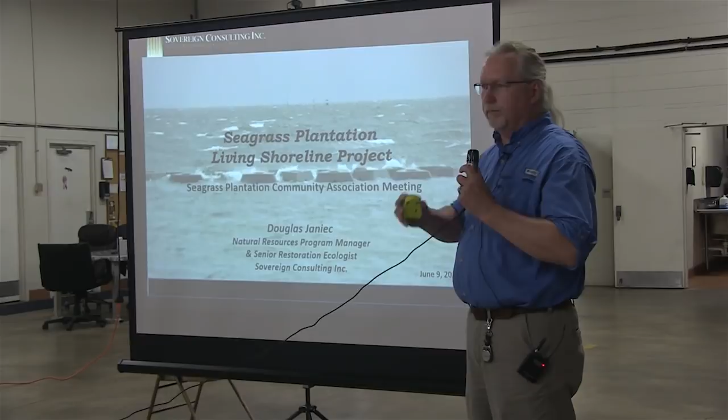Thanks, great. Well, thank you for having me here. If anybody has any trouble hearing me, raise your hand, and I'll make sure I get the microphone close. A little louder, how's this?

All right, okay, what I'm going to do here, this is going to be about a 20 to 30 minute talk, and instead of just saying what we're planning on doing, I want to explain to you why we're doing it and give some background. We're going to go back to 1963, what this place looked like then, and go through real quick on what's been happening, so you understand why this is happening. It makes more sense of what we're trying to do.

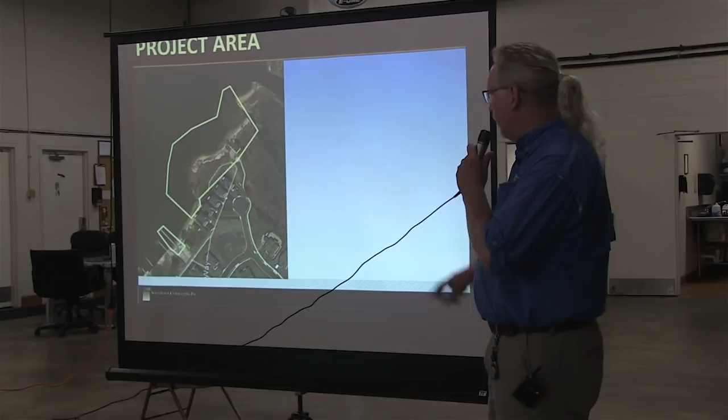Just back in here, get going. Okay, this is the Seagrass Plantation shoreline. This is essentially the project area. When we first started, this is also the study area where we did our site assessments. Another way of looking at it, this is the coastline we're interested in for the project. This is what's under the ownership and control of the association.

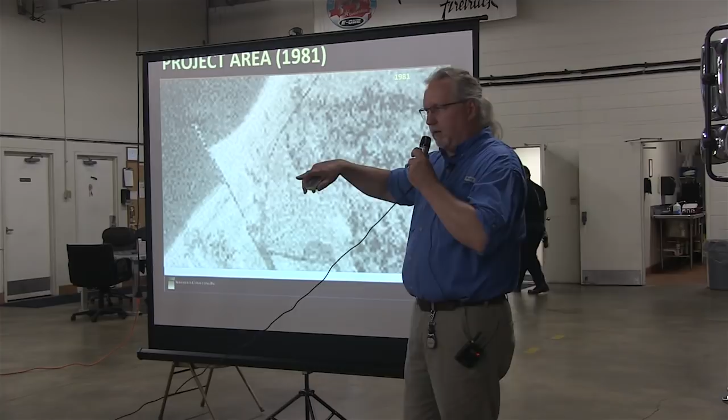This kept clogging, and eventually it was extended out. Here's what that looked like. They had to extend the sluice into the water a fairly good distance so that lateral drift wouldn't keep clogging it—going beyond the sediment drift, extending up.

As soon as they did that, it affected the shoreline. Here's the original shoreline edge approximately. You notice to the northeast you get more shoreline, and to the southwest you have less. That's typical groin jetty phenomena, based on the way the flows are. But that's where it all started, right there.

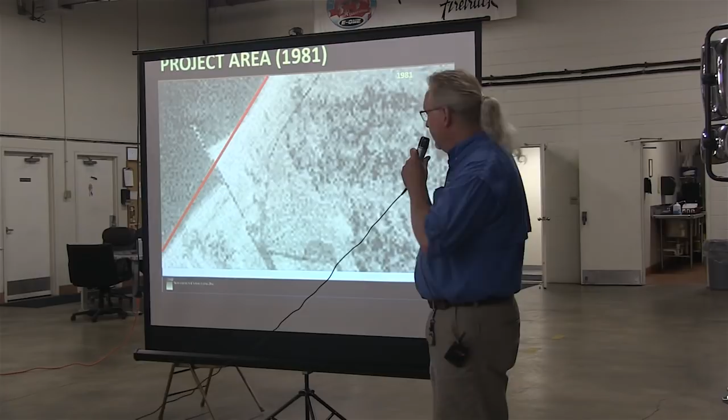So you had a real nice beach here for a long time. Along the shoreline you had a constant feed of sedimentation and not a lot of energy to pull it out, so when it got there it kind of stayed, unless you had a big storm or acute storm event.

This is an important little line here—we'll come back to it later. You can see where that line goes, just in front of the sluice and down to roughly a little bit west of where your boardwalk is right now, going out to the beach.

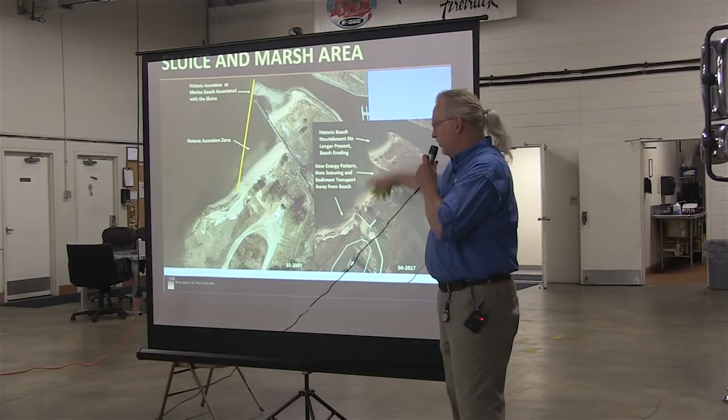Then 10 years later, in 2017, we have a failure in the sluice. This supply is no longer there. We have erosion of the beach up here, and this beach is now eroding out as well, even further.

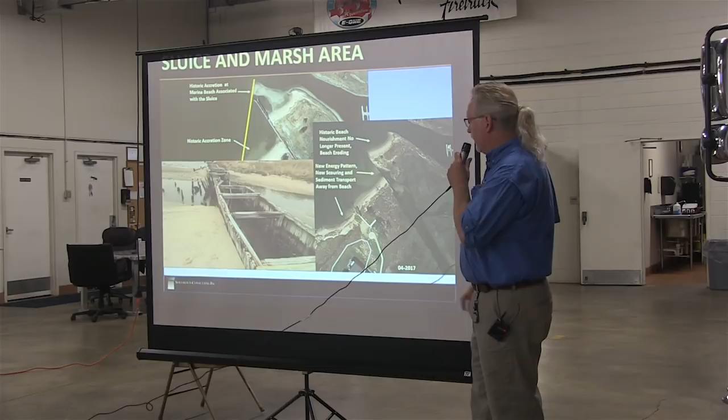That's the failed sluice—I'm sure you've all seen it at one time or another. What's happening is, since the sluice is clogged and not letting water go through, the main flow of this marsh goes through the breach, parallel to the shoreline, until it hits some structure—some remnant, either a dock or an old ramp. It bumps out a little before going out, and that's scouring your beach. Right now, the main problem here is the breach.

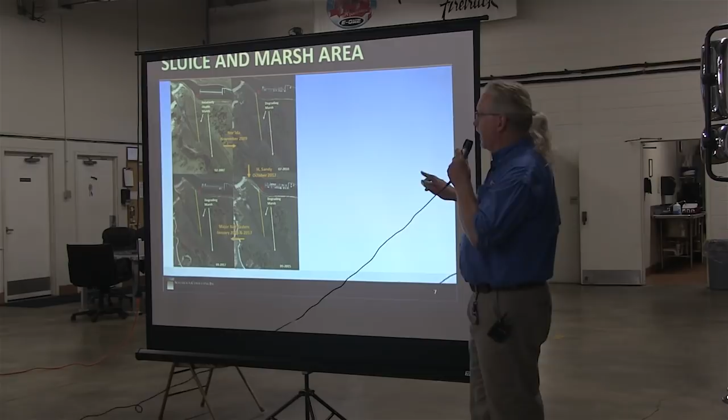So how did this happen, what caused this? If you look back at this series of aerial photography going clockwise, in a nutshell, when you have a big storm the marsh goes underwater by a couple feet—like a hurricane, a nor'easter, or a big blowing tide storm you'd get in the wintertime or fall. What happens is you have a low spot up the marina.

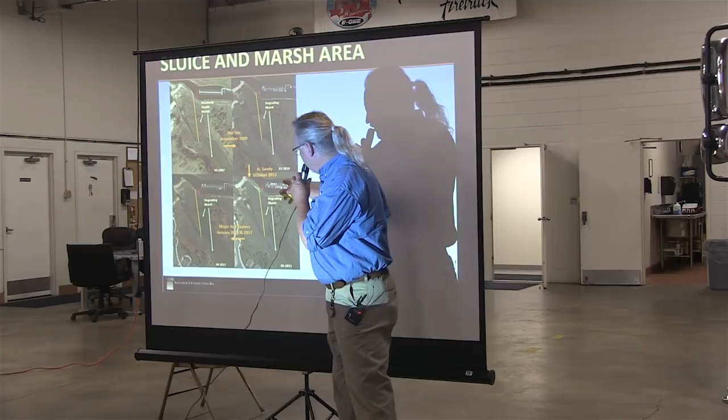That's probably where most of the water comes into that marsh, through that low spot when you have high water. It fills up, but when it recedes it can't get out the same way—it's trapped. Usually the sluice lets that out slowly over time, but the sluice is all clogged up, so the water finds its weakest point, which is where the breach occurred. Over time, all this energy coming from inside out hits your breach, and we're going to show a blow-up of this here.

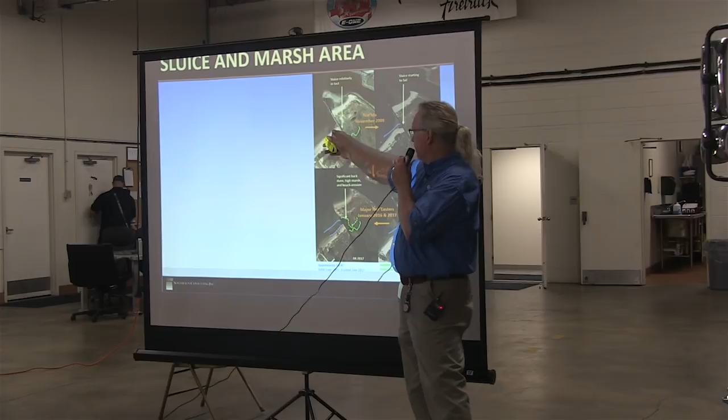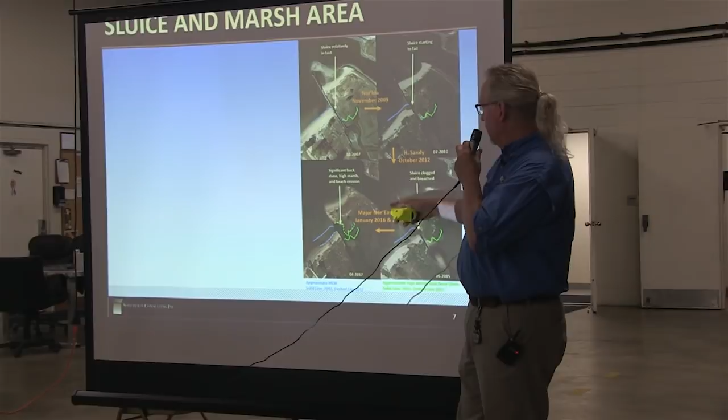I put a couple lines in this. This blue line is where your low tide line was 10 years ago, and this is where the back of the dune and the high marsh edge started back then. Going through the series—Nor'Ida in 2009, Sandy in 2012, and the 2016 and 2017 nor'easters in January, which were really tough storms—you see your low tide line has moved closer to land. You've got erosion.

This dotted line at the bottom is basically what's been eroded away from your higher ground. That's what's happening right now.

Part of the solution is going to be addressing that breach. The other thing we look at too is other energies that affect this area. Now we have this main high energy beach, or the eastern beach, which is getting hit the worst. What we have happening is most of that damage is occurring during acute events that really shake it up, and then the chronic conditions take away the loosened up material.

During a nor'easter, part of that energy is blocked by landmass and by the sluice. Other parts go straight down, direct and unabated, hitting the shoreline. We have some overwash here, which causes the sluice to basically clog up. During a high storm, this is underwater, or almost underwater. It's splashing over here, so you get a little bit of scour, but not too much.

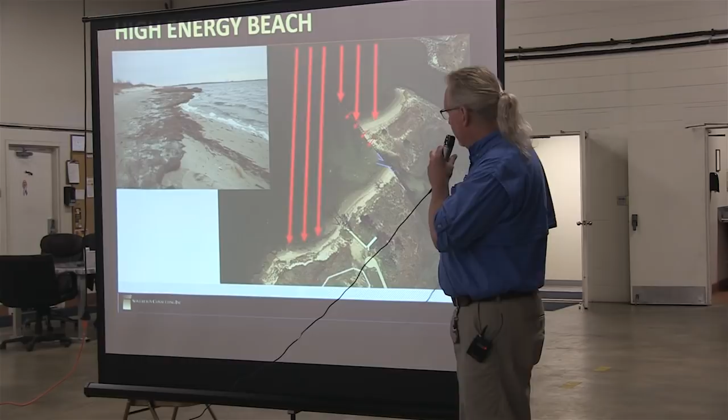And you get some diffraction occurring, which is a curving of energy. It's kind of like when you put your finger up, and there's a candle on the other side - you can blow into your finger, and the wind goes around your finger and blows the candle out. Same thing happens with water, with wave energy - it wraps around objects. So this vector is actually bending around here, but it's kind of spreading out to do that. So you have a moderate energy area.

This is my line - remember we talked about this line earlier? You have a little bit lower energy here, you have higher energy over here, and you can see the erosion patterns on your beach and how that's happening, what's causing that. So moderate, high area, and these are concerning. The main thing right now is this area is going to get improved by dealing with the sluice, but this area is not being addressed.

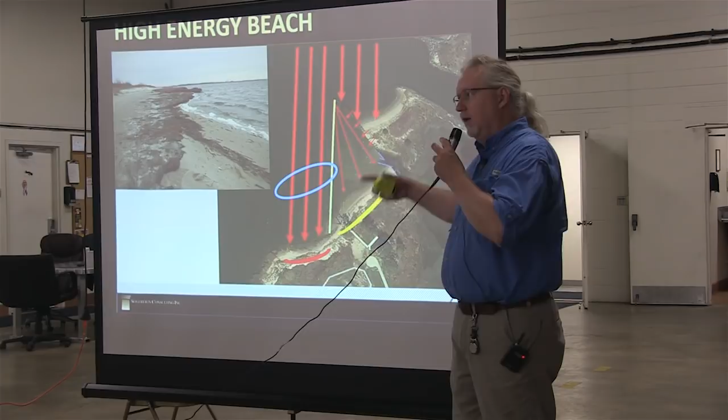So the best thing to do is to deal with energy before it hits the beach. You want those waves to break out in the water. So putting a low reef out there is the best way, because that way your waves break, and then your beach, which will start recreating itself, will also help as part of a system to break the rest of the energy, so it protects your beach.

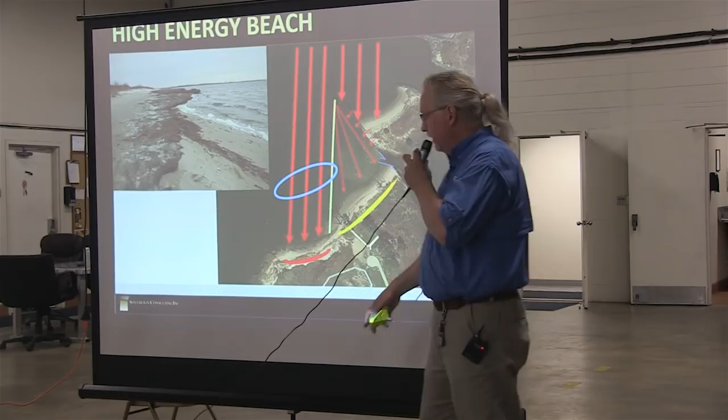Now we jump to the other side of the property - this is the western shoreline, and you have that little bump of marsh in here that's getting beat up a little bit. Looking historically, even though it looks pretty tough, the rate of horizontal erosion on that part of the beach is not nearly as much as it is at the other part. We're only talking about half a foot a year on average, which in this part of the bays is not so bad.

But there is impact that needs to be addressed so you don't get any worse, because this is also protecting structure and everything else. Down in the lower part here we have remnants of a boat ramp, which was back way before the 60s even. And also, we have a lot of old remnant partial concrete pours. I'm not sure how they got there - probably left over from a pour, and they had to put it somewhere, so they dumped it and ran, thinking they were doing a good thing.

This structure keeps that shoreline from moving, but also tends to let energy that does come through here run along it and scour out down in here. So you don't want hard shorelines - you want soft shorelines, low slope shorelines ideally.

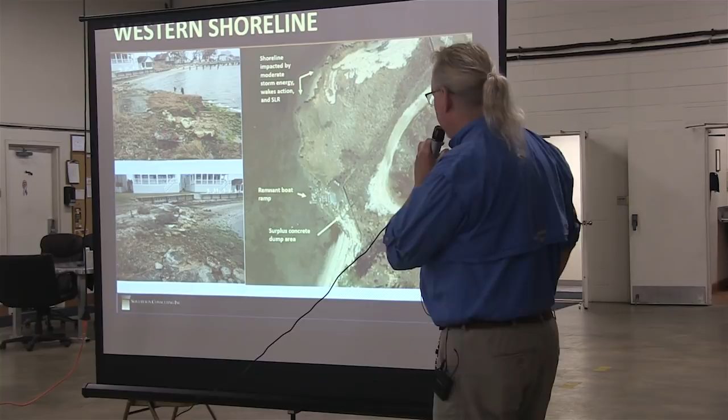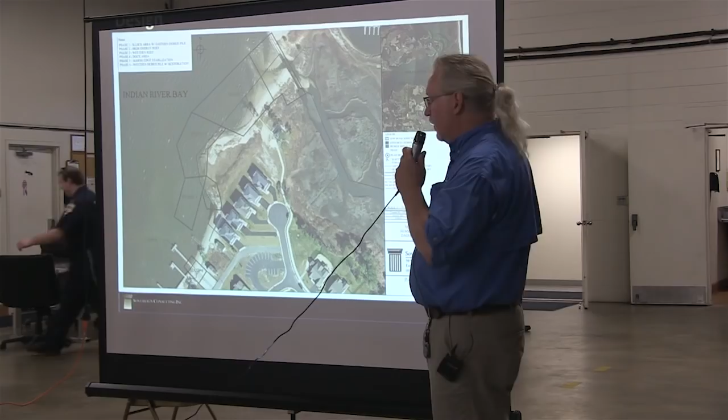So that's kind of the background on what's causing the erosion and what's happening. So what are we going to do to fix it? How are we going to help this and make it more resilient?

So what we decided to do is to break this into 6 phases. They're kind of sequential - they can happen all at once, or they can be broken up. That way, it gives the community more flexibility to address the issues over time. Okay, so phase 1 is the sluice area.

But first of all, before we do anything, we have to do some site assessments. We went out there, we collected a lot of topographic data, a lot of bathymetry.

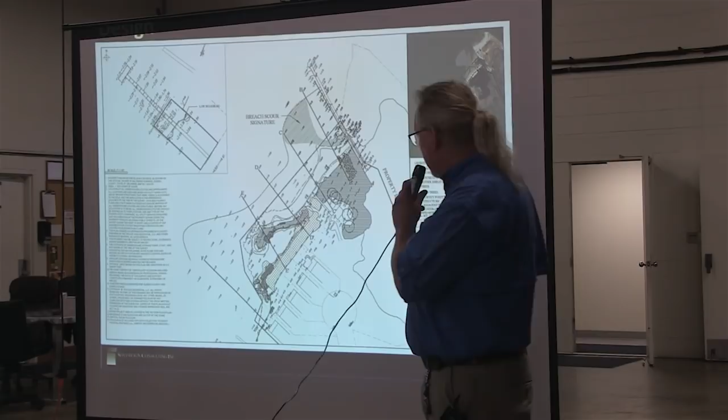We ran cross sections. We delineated habitats. We identified the extent of debris, concrete here, concrete down there, where the marsh is, high tide lines, low tide lines, mean tide lines. And the reason we do all this investigation, collect all this data, is twofold. One is we need that for our design. We also need that to get permits to do this work, because agencies require this. So we can't get around it.

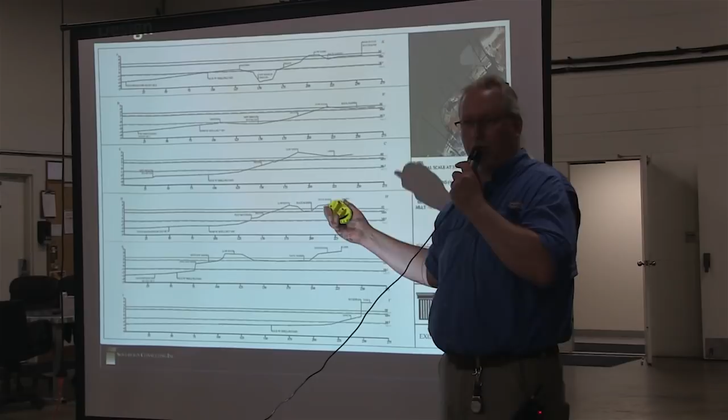We make our cross sections, that way it helps us figure out, see what's really going on, and how good the problem is, how bad the problem is, and better characterize the sites. And this way we can see not just plan view, but also a cross-sectional view.

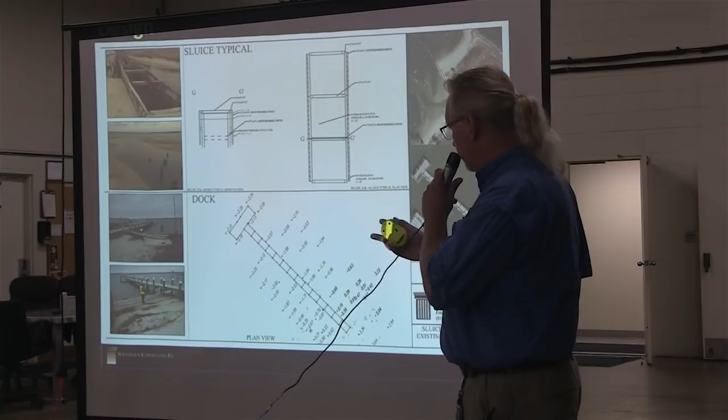We also detail major structures. We detail out what the sluice is, the dimensions, and also the dock. And then we have areas of special interest, like the sluice area. We'll do blow-ups and collect a little more intense level of data. Again, this is for us to do our design, also for agencies to understand what's going on here.

So now we get into design. We're back to our areas. Talk to phase one. It's the sluice.

Now, one of the things about this, when they did the mosquito, the sluice there for this, they didn't go through the detailed effort and didn't have the knowledge back in the 60s that we have now. And when you do the calculations, the amount of water that can go through that sluice is about less than a quarter of what the marsh needs to really flush properly.

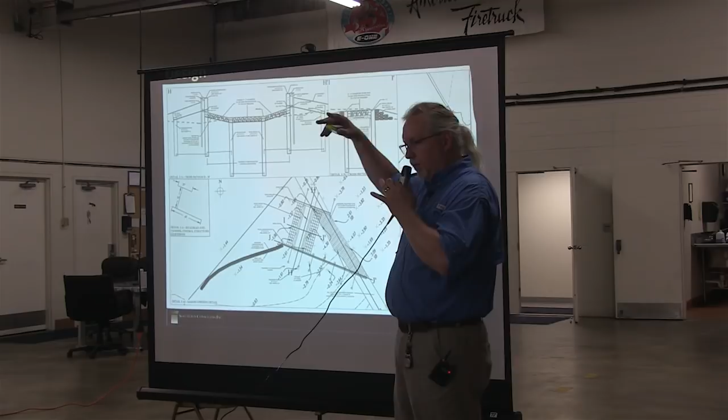It also has a standard amount of flow throughout that, where a healthy marsh during high tide has its highest flows going in and out. During the low part of the tide cycle, that flow almost gets to a trickle. That's the reason why that happens. It's healthy because low flows give you low energy, and that's where the water energy is closest to the substrate. When you have deeper water, the energies tend to be more toward the top of the flow, and that way the marsh is protecting itself: deeper water, higher energy, shallower water, lower energy.

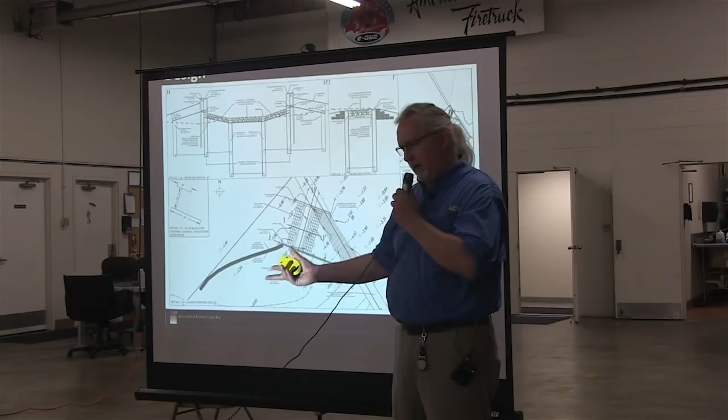So currently, that breach is about 10 or 11 feet wide, the main part of the breach. It needs to be about twice that. And what's happening is, because it's not wide enough, it needs to get the volume through. So what it's doing is actually digging itself deeper, trying to allow more volume to go through there, which is not what you want to do in a marsh. So we have to control that.

So what we did is we actually modeled and sized, based on the size of the marsh, the proper size of that channel. We're going to use this breach and make it the permanent opening, instead of trying to deal with the sluice, which right now is too low for design. It's not large enough, and it's financially just unfeasible to maintain for any of the communities around here, so we're going to use that opening as the new marsh opening.

But not just doing that and sizing it correctly so that it controls the energy, but also by building a structure that goes and angles out into the bay, we prevent that opening from running parallel to the shoreline. So we're going to stop the shoreline erosion in doing that, and allow this area, once again, to fill up and become more of a beach again.

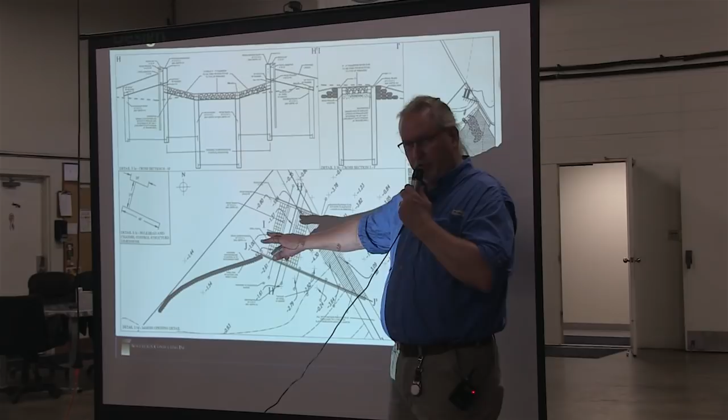So we're only talking about coming out from the sluice at an angle about 40 feet. It's not real far. It's just enough to get it past a point, and that way it will cut its own channel going through there.

What it also does, the added benefit—which isn't necessarily important for the community, but for the marsh it is—is that it's going to prevent some of the erosion that's happening right here. It's going to have an angle coming in here. It's already cut out, so it's going to slow down any kind of impacts to the marsh.

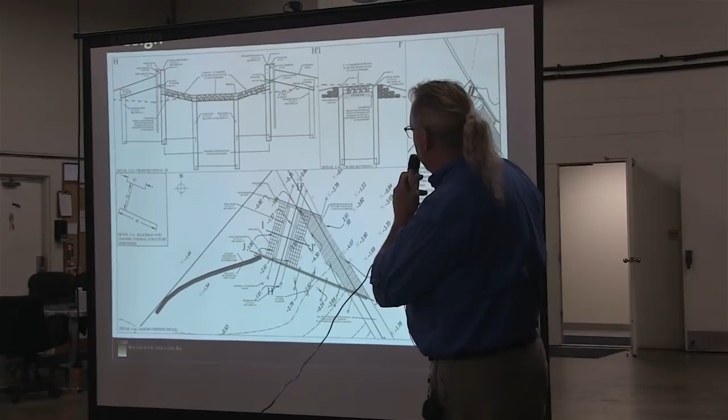So when we do that, what these designs are showing is a cross section going this way, and this is a control structure. It's between this new channel control we're going to have. What that does is give the proper dimension you want the channel to be in: wide and shallow. By having this feature there, it will give the channel a permanent guideline on the dimensions it wants to be.

And already, I'm going to go back one slide, a couple slides real quick, just to show you—it's actually down here.

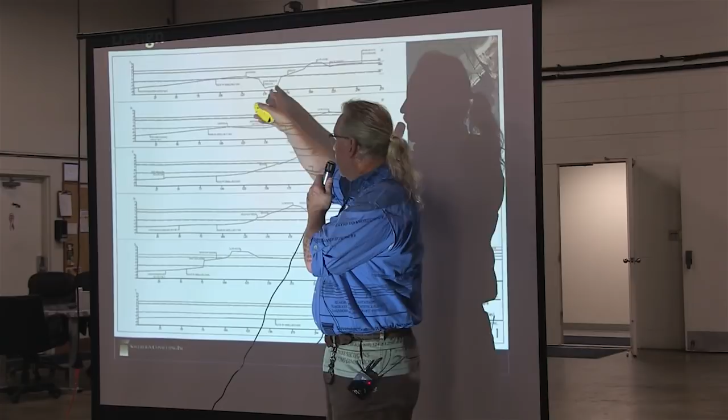Back to these cross sections. Okay, this is not the actual where the breach is, this is just in front of the breach, about 10 feet or so. See how deep that is? You go out another 15, about 20 feet, and see how that changes all of a sudden because that restriction is eliminated. This is what it naturally wants to be, more of that shape, shallow and wide as opposed to deep and narrow. So when we make a structure, we're going to control that.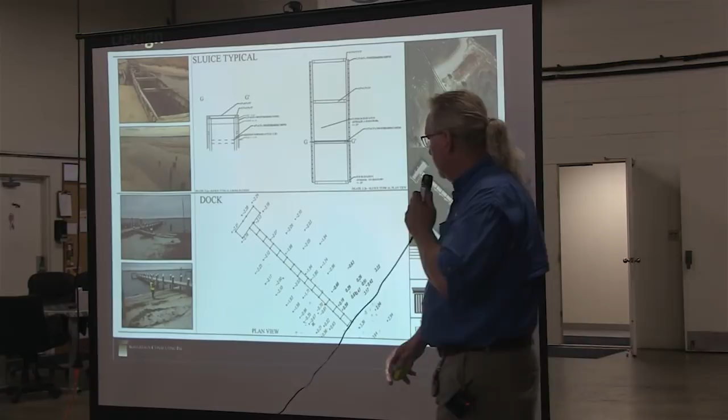We're going to make sure it stays that way, so it can continue into the marsh that way. Just catching up to where we were. Okay, and this is just some more details on that feature.

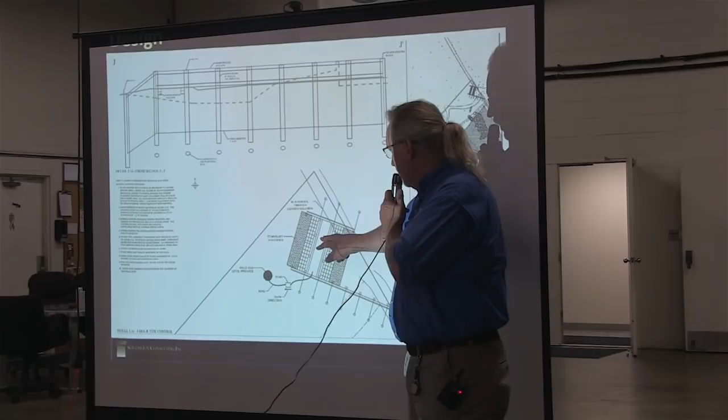This is going to basically have some walers going across here down to the sand. We're going to put a liner, put some river run stone, which is smooth stone, so there's nothing sharp out there. Then we're going to put some shell bag on either side, mostly bury the shell bag, and then we have this nice, shallow, gradual thing. This can actually be walked across when it's all said and done, or in front of it, so it gives you some ability to get over there too.

The other part of this phase, there's three other parts actually. One part is from the structure, we want to bring a little toe here. This is going to be just shell bags, real simple. What's going to happen is, this is a little toe, because we're going to put some sand back here. We're going to bury all these tiebacks under sand so there's no health safety hazard, and it's going to look more like the beach used to look. This just holds it in nicely.

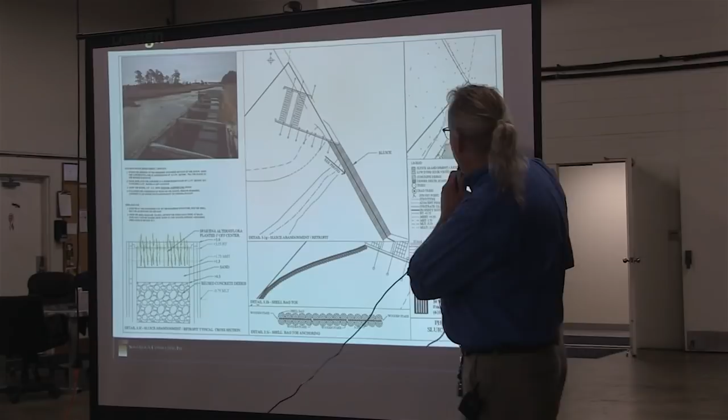Also, the debris pile of concrete back here, part of the scope is to remove that. That's going to be taken away, and some of that's going to go into this back part of the sluice that's exposed. Right now, that's a safety hazard. Having kids, grandchildren come back in here, they're playing, they get too close, they fall, and no one even knows it happens. It's a hazard.

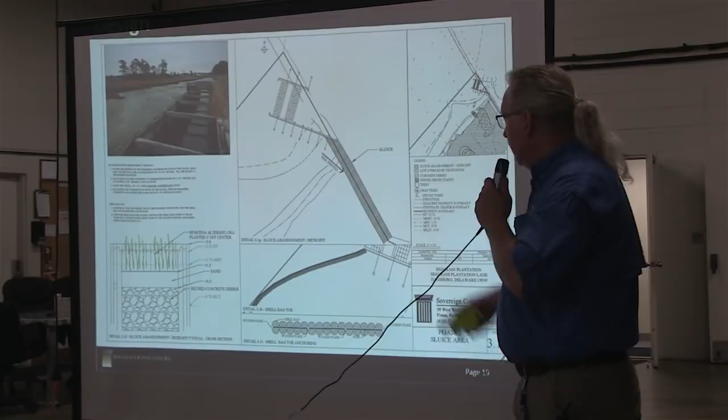So we're going to basically fill it in a little bit, then we're going to put some sand, and we're going to plant it, so it's going to look like marsh. Instead of being water standing there in a hole, there's going to be grass growing there, marsh grass. So that's what phase 1 would entail.

Now, for phase 2, we went through a lot of discussion. This is the reef part we're talking about, if you remember this diagram we had before. We went through 6 alternatives. 2 alternatives are more of an oyster castle or shellbag reef, at the bottom end of it, below the design elevation, and that was quickly dismissed. We showed that in 2 different positionings.

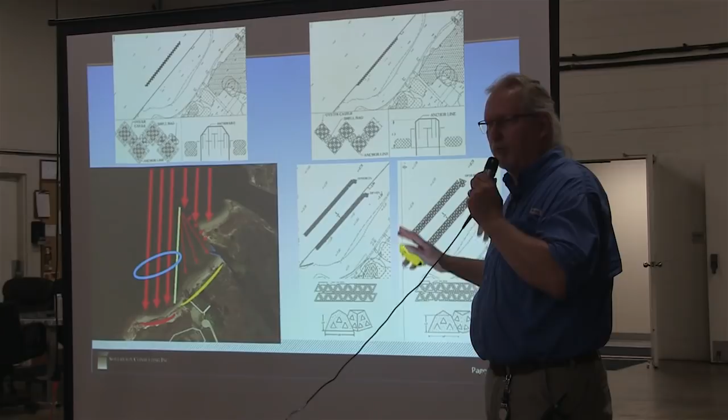Then we went with the wave attenuation devices, which is concrete structures designed to break wave energy. They've been used around the world. One's a 3.5 foot size, one's a 2.0 size at different configurations. One of the things we look at is, what's the benefit, the pros and cons?

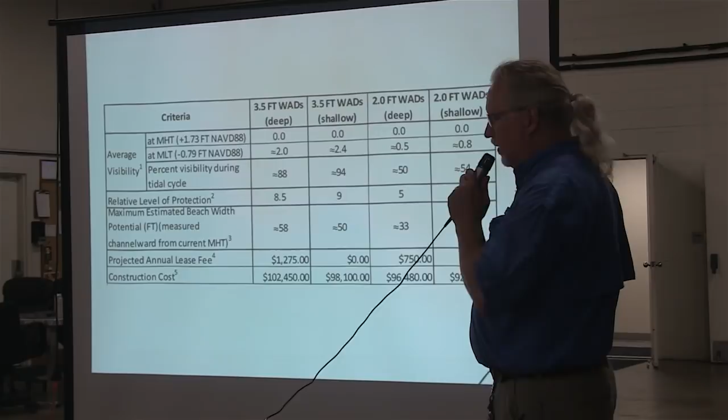I put together a quick summary, not all the things we consider, but some of the big ones. The very top is average visibility. Visibility is an aesthetic element, grouped in what we call ecosystem services, which is a fancy way of saying how the community benefits or enjoys natural circumstances, whether it be bird watching, kayaking, or some kind of recreational fishing. But visibility, aesthetics is a big one for any of this stuff.

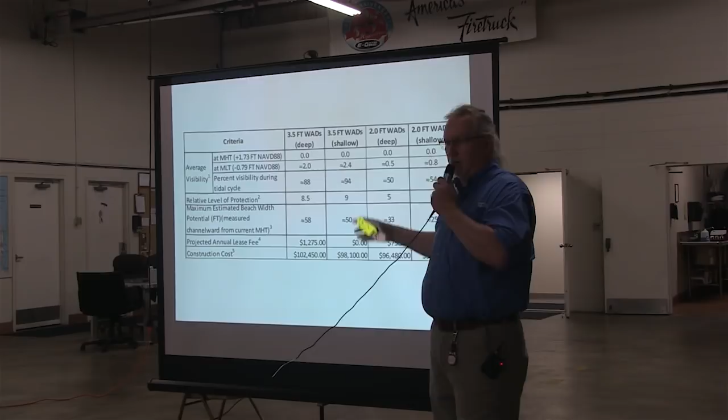Any kind of reef you have out there, even though it's going to be below the mean low tide line or at the mean low tide line, you're still going to see some of it sticking out of the water. There's no way around it, because if you don't have it high enough, it's not going to break the waves sufficiently to protect the beach. Whether it be stone, whether it be these structures, these wads, or some other kind of structure, you're going to have some visible. That's a trade-off for protection of the beach.

Now, we look at this in some different ways. We can look at mean high tide.

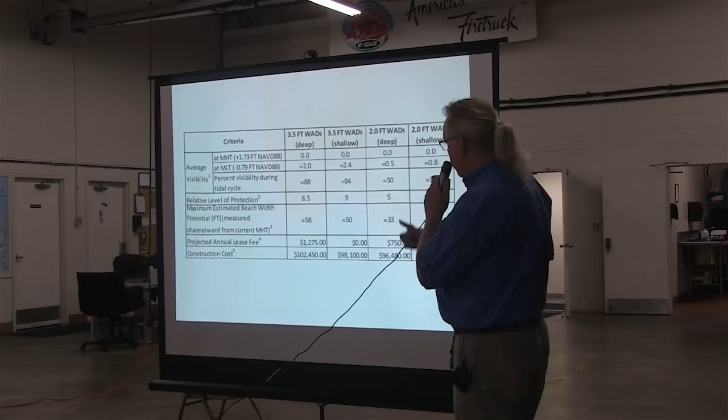What are we going to see? At mean high tide, even the highest one, which will be this one right here, shallow, 3.5 feet high, will just be under the water.

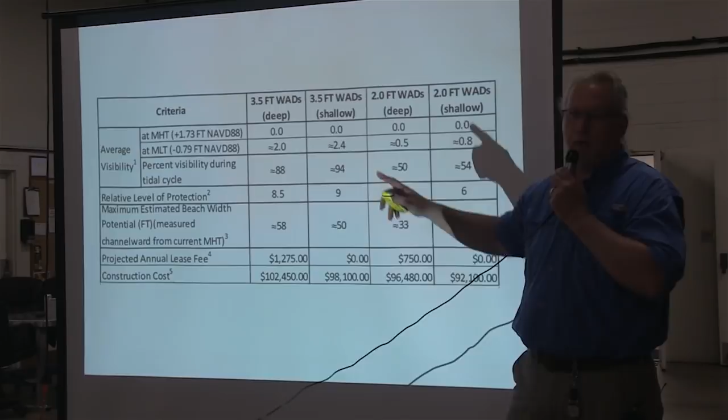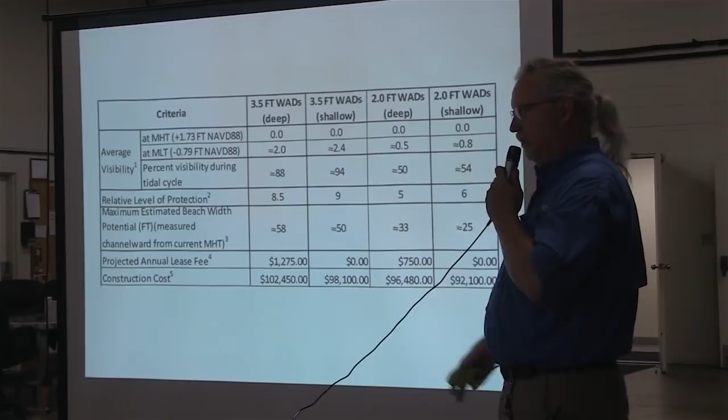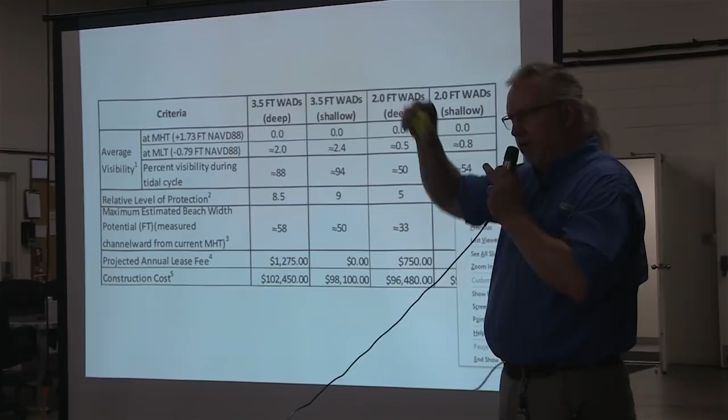At mean low tide, you'll be anywhere from half a foot exposed to 2.4 feet exposed of the structures. These structures, this is for a 3.5 foot high structure. Also, rough estimate on how much during the daily tide cycle, how long you're going to see either an inch to a couple feet of it exposed, and the numbers are significant. So during most of the tide cycle, you'll see some of the structure. There's no way to hide that, no way to address it, no way to change that. You're going to see it.

We also look at relative protection. This is real important—how well do these structures protect? This is a scale of 1 to 10, a relative scale compared between structures. It's somewhat subjective, but what you look at is, first of all, how well do they dampen waves during different storm events, whether it be a common storm, a 10-year storm event, a 50 or 100-year storm event, what have you. Also, we look at it not just as a structure, but how does it work as a system?

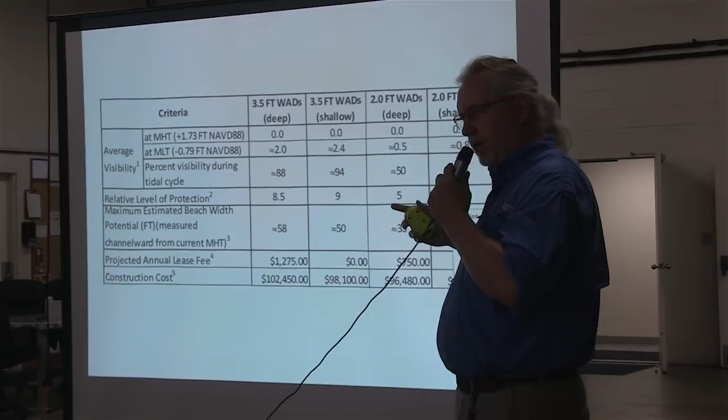Because these structures help to create beach too. So once you put them in, over the next couple of years your beach should expand because it helps to create material behind it. So that's part of the system, because your beach also helps to dampen wave energy. So when you look at the first wave events, that would be the structural component, then the beach protects, then the dune protects—another step. So it's a system of protection, multiple things that protect you when you have a storm. That's what this addresses.

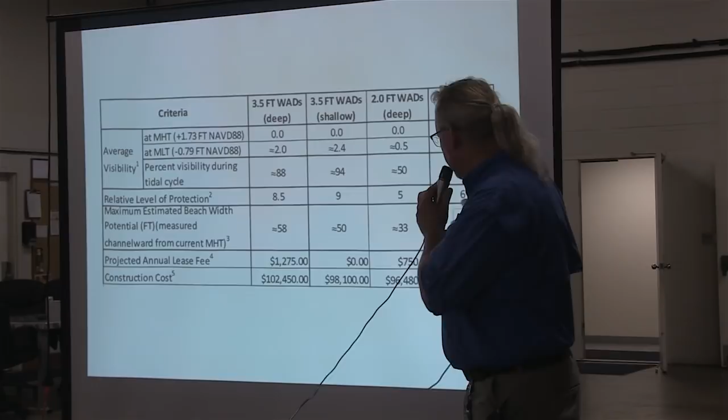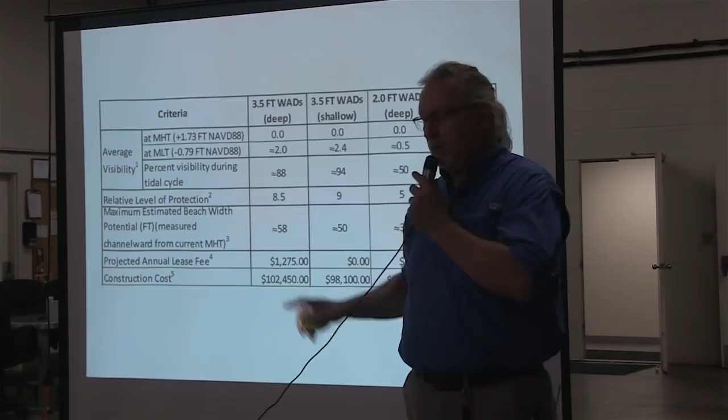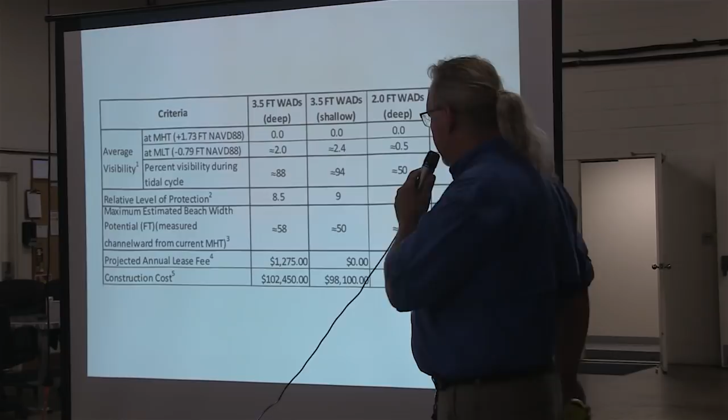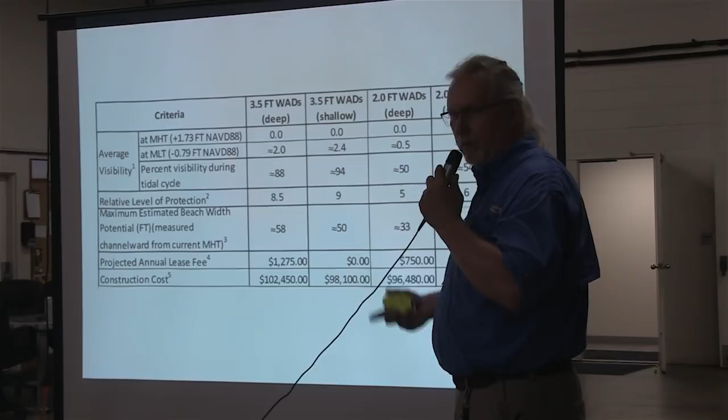You notice the two 3.5 foot ones are really close, almost identical—that was a wash. Then these lower ones drop down a lot. That 1.5 foot difference in height makes a huge difference on the amount of protection it can give you, especially when we're talking waves during storm events. And also with sea level rise, that's the other big carrot in the sky there—we want this to work more than 5 or 10 years. You want this to work for your generation, and then your kids' generation, and so on. So you want something that's resilient and persistent, and so you need height to do that.

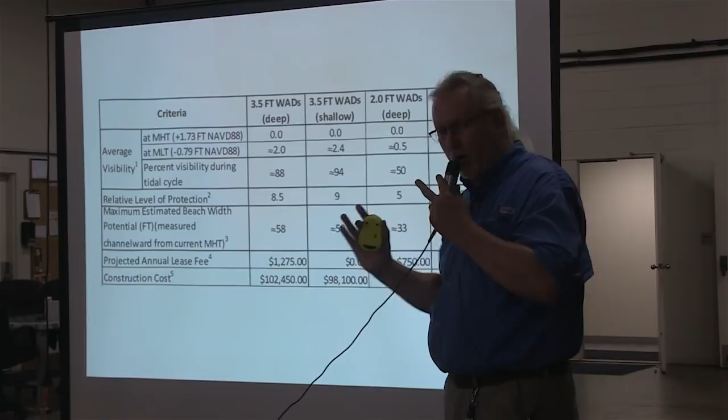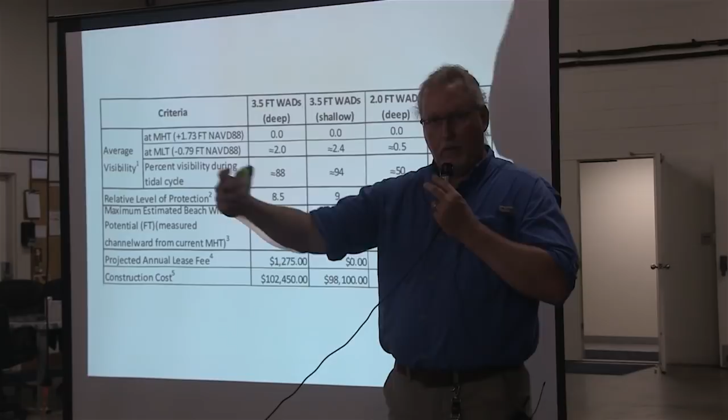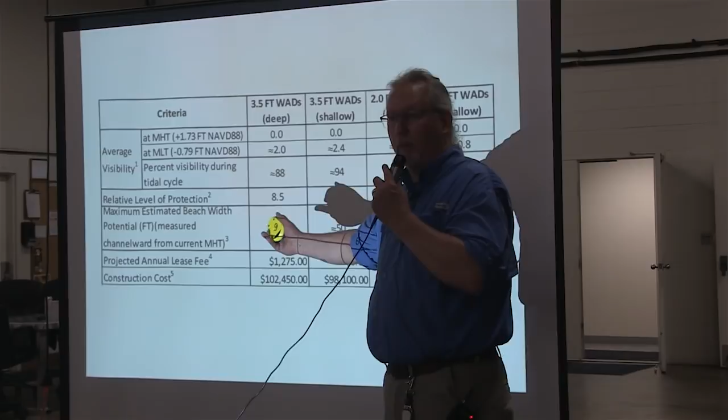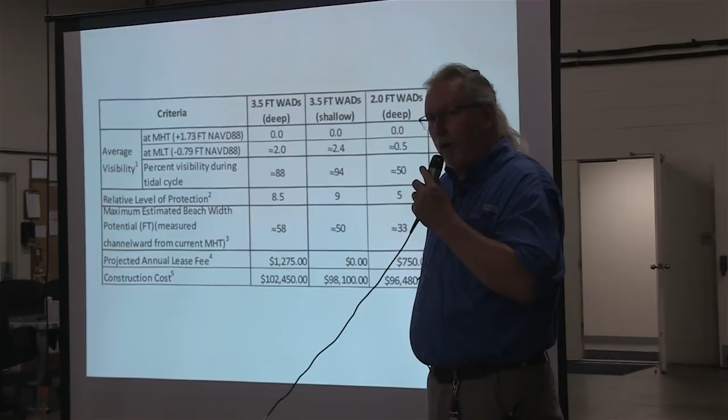The other part here is what I call the maximum estimate beach width. When you look at certain heights, topography, slopes, and everything—and also what's happened, past performance on other sites—you can get a pretty good idea of the maximum potential of how much beach growth you can have with this structure. You can see they vary based on the various situations. It's height, and it's how far from the beach you are, and also the beach bathymetry—those are the three main factors that really address this. So you can see the higher ones can give you more, have potential to bring more beach out. These are linear distances from the mean high tide line going back toward the channel. So you can actually potentially get 50, 60 feet of beach that could potentially regrow back over a number of years.

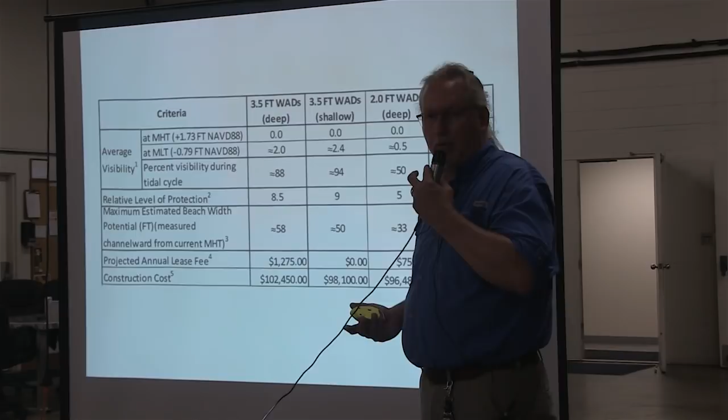The trick with this is how quickly, because it's weather driven. If we have a big storm event, we get more sediment put back there, and it goes quicker. If we have small storms, it takes longer. If we have big sediment loads coming across, that's quicker. If we have clear water with fine or low sediment loads, then that takes longer. So those variables—that's a huge $100,000, $200,000 model to give you accurate stuff on that, which isn't worth doing. It's going to accrete. The question is how many storms we need to do it. So, too fast.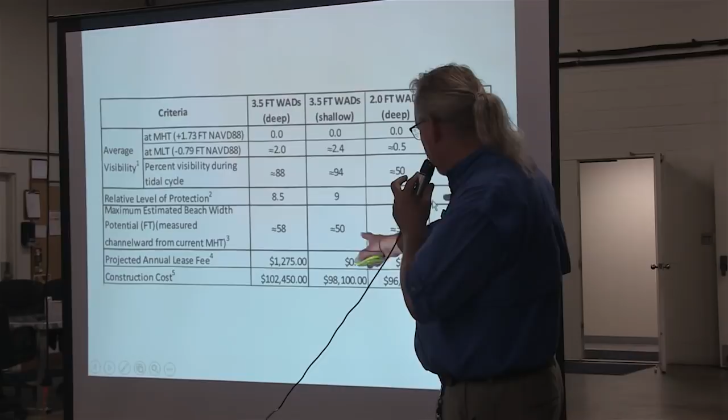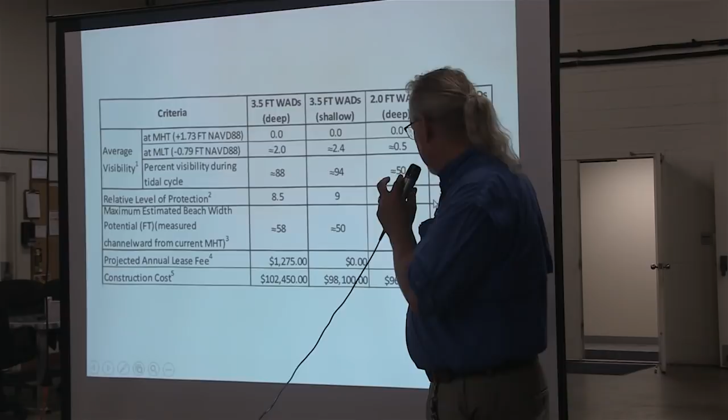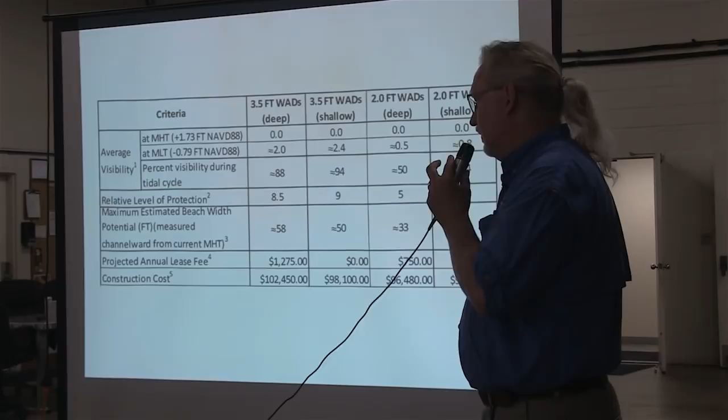The last couple of things here: one is permit-related costs and fees. If it happened today, these are the fees that would be tied to it, and also construction costs. Between these, you have about a $10,000 range between the two. Between the two better ones, it's a $4,000 range, and we all considered it a no-brainer either way, because it's essentially a wash when we think about it—only a few percent difference.

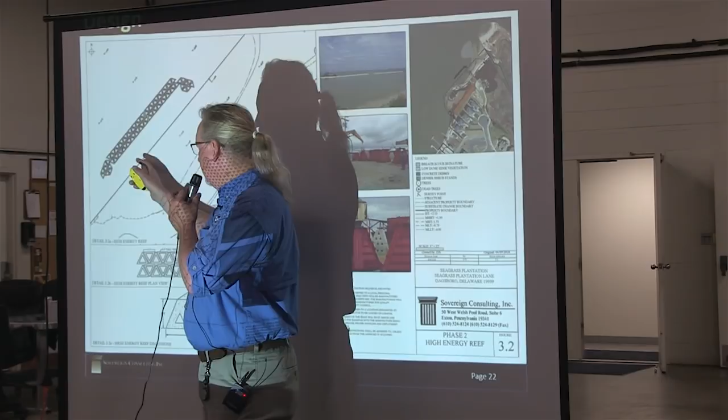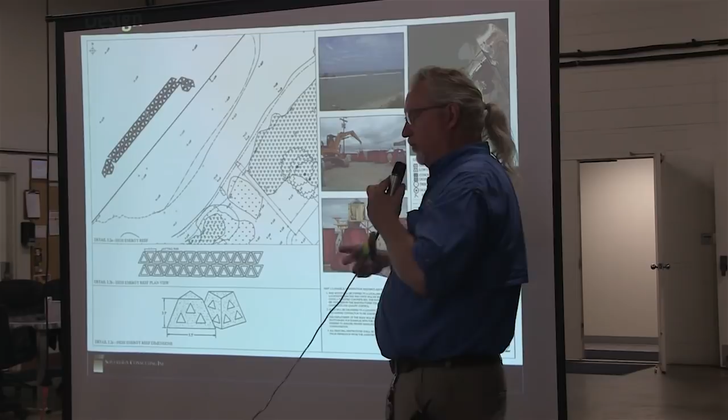So what we came up with is using a 300-foot wall farther out to get the maximum benefit of everything. Another thing I'd like to point out is that when you're standing on the beach, an extra 30 feet beyond the other option, about 25 feet back, makes a big difference. You may not realize it, but an extra 25 feet is roughly like me to the van. Having something farther away makes the object look much smaller and less noticeable. It makes a big aesthetic difference having it farther out, so I wanted to point that out.

Phase 3 is the second reef on the west side here. The idea is to protect this corner, prevent scouring, and allow any restoration here to occur. This is real simple. This is lower energy — it doesn't get the exposure from the nor'easter storms, just softer western storms.

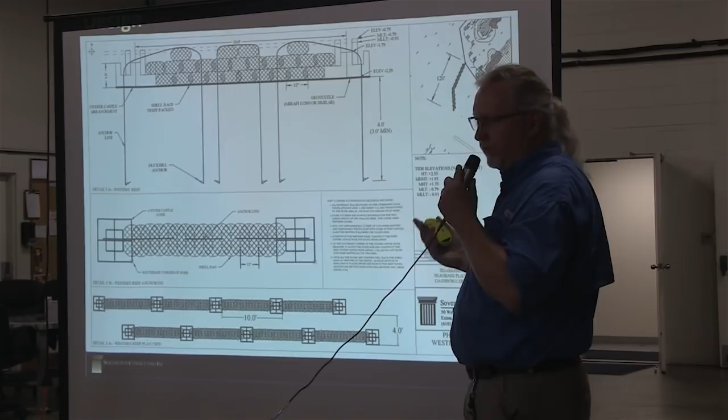Most of these happen during the summer. Occasionally you'll get a winter inland storm coming up, but they're not as intense, so you don't need anything as strong or severe. This is a lower reef too, so you won't really see it — it'll be at or below grade across the board, almost invisible. You'll see a shadow for the most part, and that's about it. It's a double array coming in here to break up the wave energy and protect this area.

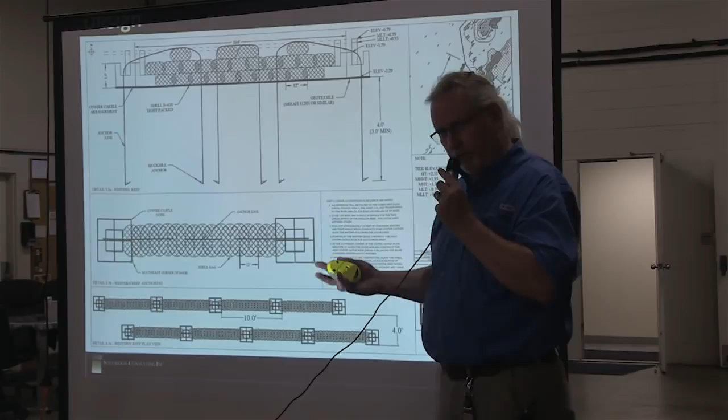Nothing real tricky — it's basically oyster castles, which is a glorified cinder block, plus cinder and shell bags, which are cabled down and anchored in.

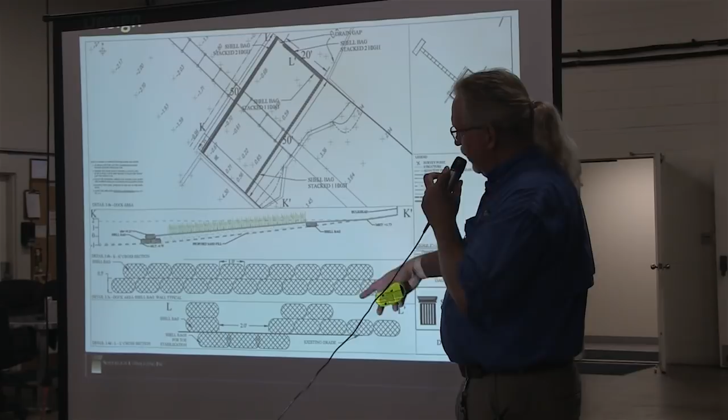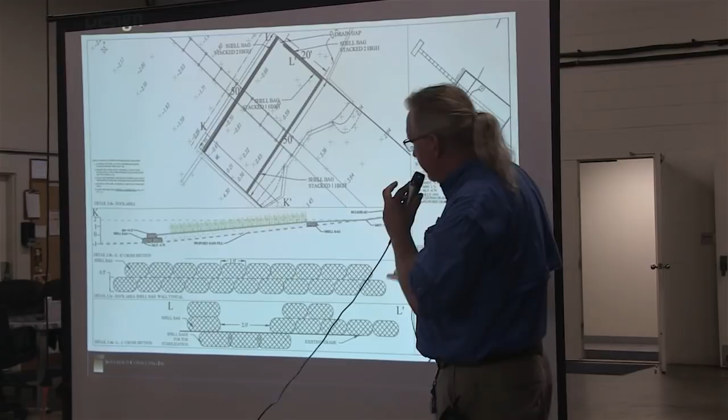Then we jump to Phase 4, which is the dock. Again, a real simple solution — we put a little toe in here, add some sand to raise it up to the proper elevation to get vegetation. That gives protection, a higher, gentler slope, vegetation that also dampens wave energy, and then a little beach behind it. So you get improved aesthetics, improved function, improved stabilization — real simple, real cheap to do.

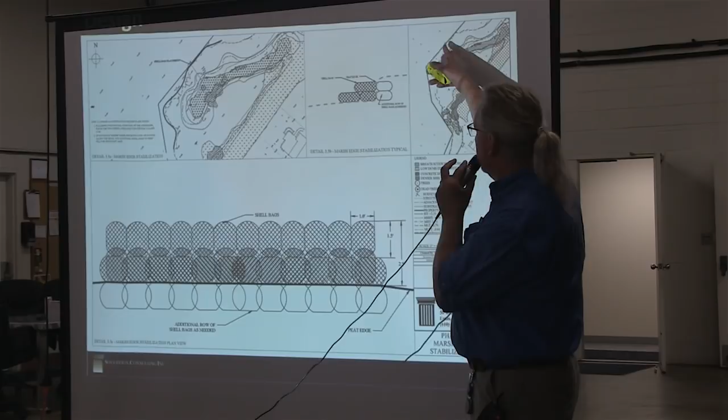Phase 5 is relatively simple, because remember this area wasn't eroding at a quick rate, but it was still eroding. We want to put enough natural structural elements in there to stop the undercut. What happens is the marsh platform gets undercut, collapses on itself, keeps doing that, and eventually washes away. If we can prevent energy from causing that undercut — which only requires something about a foot high next to the shoreline — that protects against it, and the marsh becomes much more resilient.

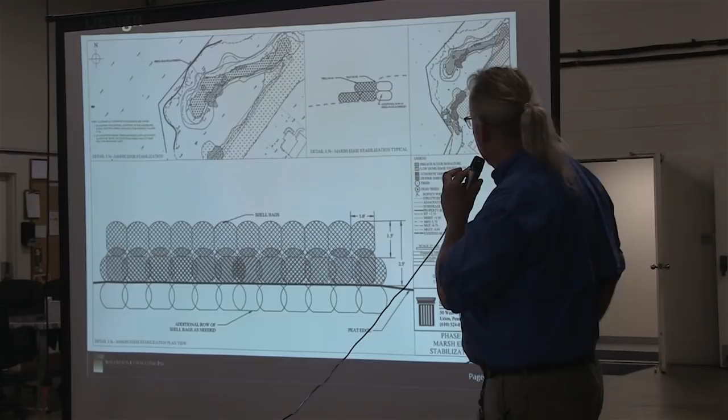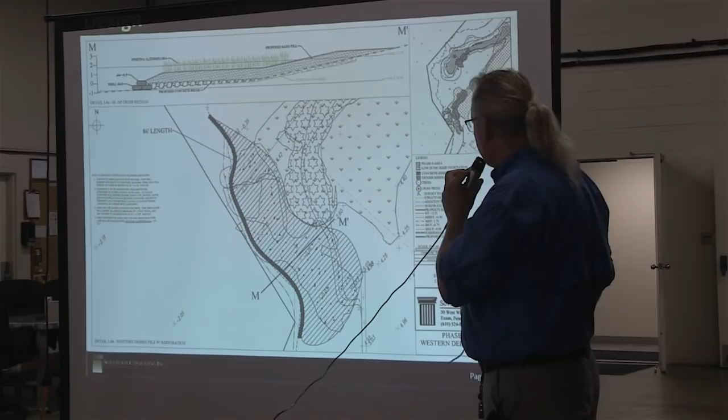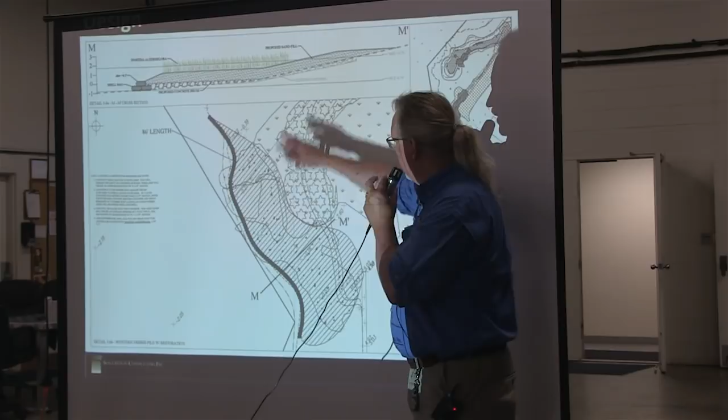Phase 6, the last one, deals with this other debris pile — concrete, bricks, wood ties, all kinds of stuff out there that's not utilized or functional, either for the community or for ecology. So we thought we could bring equipment in, break that concrete up into smaller units, spread it out, put a layer of natural material on top, revegetate it, get rid of the eyesore and the hazards, make it functional, and tie it into the existing marsh next to it. That also stabilizes the shoreline.

This is contingent on the Phase 3 reef. Without that reef, this design will probably work, but I couldn't guarantee it, because there'd still be a little too much energy for something like this — you'd have to do a little more work. So they all kind of work together in the system we talked about.

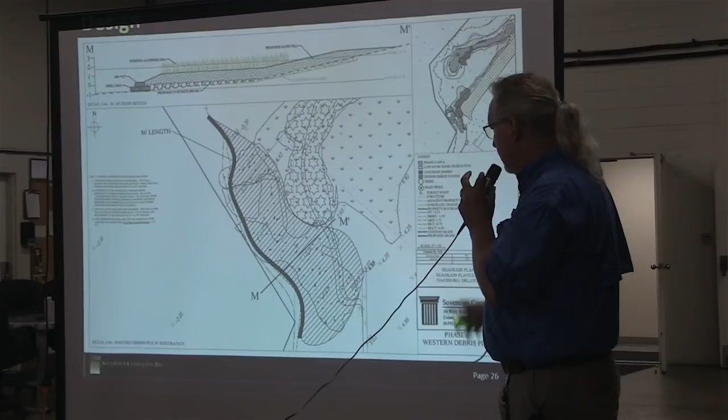And that's in a nutshell what we're proposing to do.

Robert Harrison: Isn't everything after Phase 1 really supposition at this point, until we find out what the hydrology is going to be from the new sluice coming out? Because this is going to interfere with some of the energy coming in — I think it was Phase 3 or 4 on the curl around where we're putting a jetty in that's not counter to the energy coming ashore, it looked parallel to it. But after Phase 1, don't we need to wait and see what happens?

We designed Phase 1 to work with Phase 2. The angle of that bulkhead work at the breach angles it so beyond that, the toe and the beach replacement actually connect into the tie-in with that reef. So it's designed to work together — we don't have to wait for that, that's not going to be an issue. When you first design something like that, the first thing I consider, like you said, is that it gets out of that sluice and tries to go lateral again.

What we don't want to happen is have that channel flow curve behind the reef, landward of the reef, because that's just going to create a scour zone and direct it right into that little bump of marsh we have. So we use the angle we have, the distance we extended it, and the positioning of the reef, and also that little toe where we're doing the nourishment, to keep that from happening.